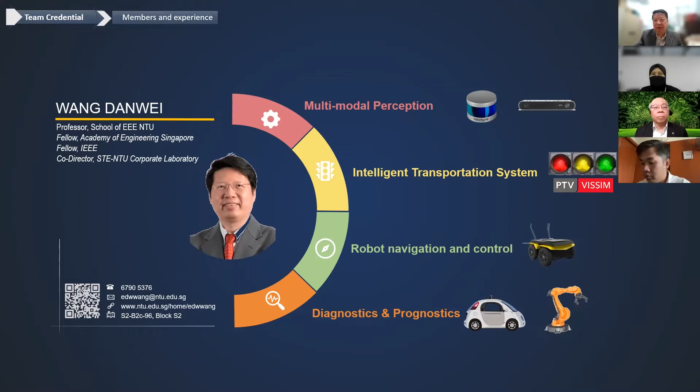Firstly, I want to acknowledge my team, which has grown to about 26 or 27 researchers. I'm still recruiting. Among these 26 team members, quite a few are PhD degree holders, and the majority are master's degree holders. They are very capable from theory to implementation and system integration. They have all kinds of backgrounds, so we are able to manage the whole chain from theory to implementation by ourselves.

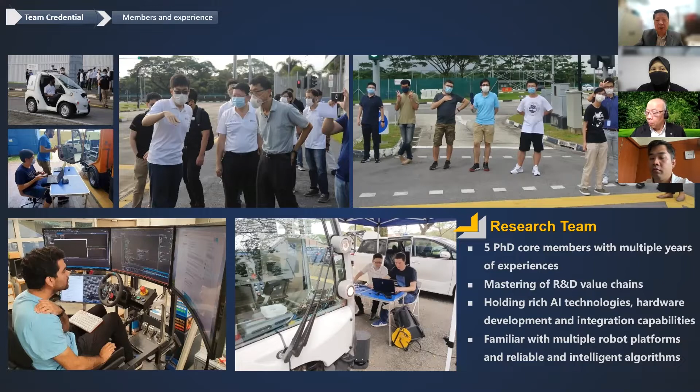As you can see, our systems are developed in various scenarios - outdoor, indoor, and so forth. We have achieved quite a few meaningful results in the past, and we have won some awards.

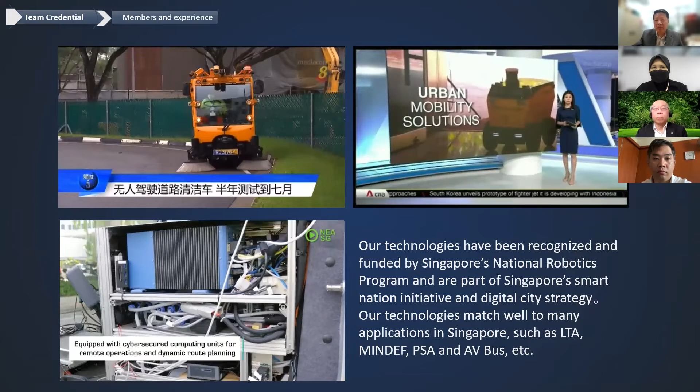In January, NEA announced the launch of proof of concept trials of autonomous environmental services vehicles for road cleaning. These self-driving vehicles are controlled using computing units, enabling remote operations and dynamic planning.

We have been working with industry for the past 15 to 20 years, and from there we see a lot of application requirements. Mostly from government, especially NRF, they provide us funding, and we work with ST Engineering, NEA, Continental, and some other big companies. I also work with some smaller companies as well. These are the major fundings.

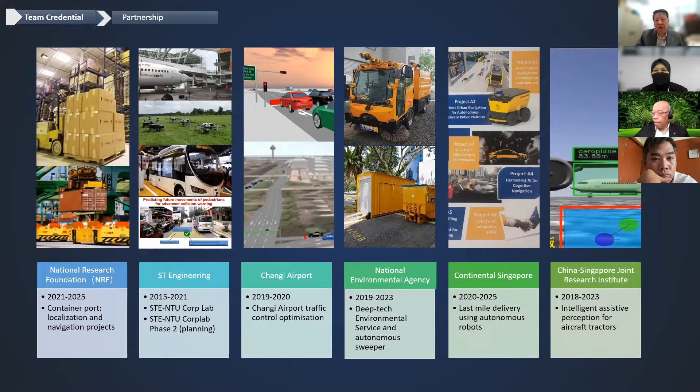From these collaborations, we realize applications out there demand intelligent sensing. They want a reliable sensing capability to upgrade their equipment, their capability from the current version to the next version. The next version is enabled with intelligence - so how to do it? The sensing is the key. In past research, we have filed quite a few patents, mostly on sensing and intelligent sensors.

One typical example of this industry requirement is we are working on a project on this autonomous sweeper. The problem statement is coming from NEA - they want to enable sweeping, the environmental service, with the newest technology, deep tech. We have done this project in the past 3 to 4 years, and we have achieved a lot, as you have seen on TV. If you search 'sweepers NTU' or 'teleoperation NTU', you are going to find the media information.

In this project, the vehicle needs to move in outdoor real scenarios. They have to deal with all kinds of situations - in good days, in the morning, in the afternoon, at noon, the sun comes from different angles. During foggy days, during rainy days, and during different situations, even smoke.

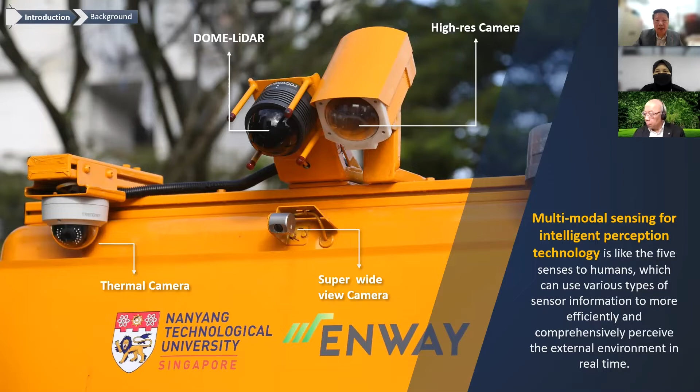When we have so many sensors looking around the environment, we need to understand how this information is fused together and how we interpret all this information to achieve meaningful information so that the computer can understand and follow up with decision and execution.

So this one, as I mentioned, the intelligent sensors actually promote the upgrade and iteration of the intelligent perception industry. Just like environmental service, now it's being done by some foreign workers - we hire them to drive the vehicle. In the future, people could be sitting in an air-conditioned environment, teleoperating the vehicle, or the vehicle running autonomously outdoors.

This will upgrade the whole industry sector, not just one individual machine, the whole sector. So our Singapore young people might be interested in going there, sitting in this nice environment, playing with these intelligent big toys.

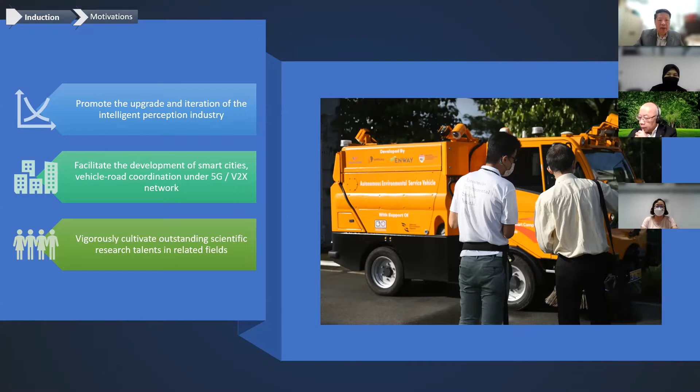Actually, it's not just one or two stories. If you look at the market survey, these intelligent sensors have a great future. By mid of 2023, this advanced perception function will become a standard configuration of collaborative robot systems. These days we hear about robots, but single robots is basically mature.

What we are looking into is when we deploy robots, we want to deploy them in large quantity. So we are going to manage a fleet of vehicles, a fleet of robots. They need to work together, so the perception of each robot, or as a team of robots, will become an important issue. With more perception from multiple vehicles, multiple sensors, you can enhance this intelligence tremendously.

Everybody heard about Tesla, and they have camera systems on each of their autonomous vehicles. When they run around, they collect all the information and put it into the cloud. The cloud provides the training, gets the information, and at the same time feeds back to the individual robots, the vehicles. So basically, this is collective intelligence, based on multi-modal, multi-sensor, multi-robot systems.

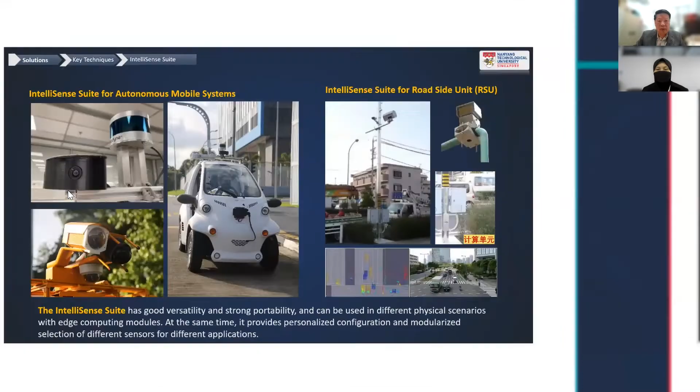So for this intelligent sensing, which is the first thing, we want to have good sensing capability. The first thing is we need a suitable sensor suite. Based on the application, you need to choose the right sensors, their range, their capability, and what results you want to achieve. Then you select a set of sensors with different capabilities and put them together.

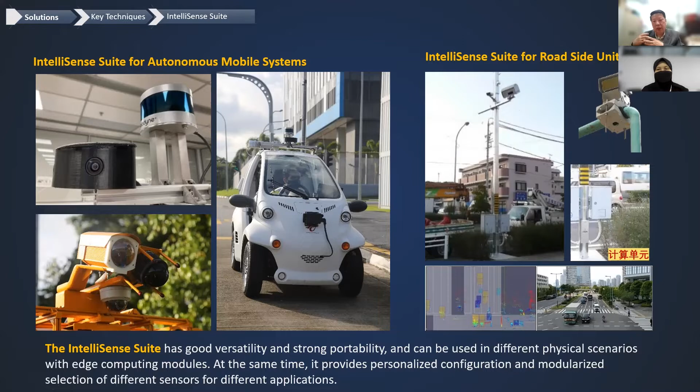Such as on top of the car, on top of traffic signal poles—in these cases, based on this input, you can fuse them and get what you want. This will require integration of some sensors. These are some of the products we have developed. This one is a handheld sensing device which can detect people, chairs, tables, cars, airplanes, and whatever.

I'll show you what it can do later on. The other one is on board a vehicle. We have two sensors on the two sides of the vehicle, and one unit in front of the driver. So this one is basically assistive perception.

In many situations, we human beings are not able to see so many things or monitor the danger. So this system will help us monitor the front, such as at the airport with tow truck vehicles pushing a huge aircraft. You hear about accidents, collisions between aircraft—that's a tremendous loss to the airline and passengers, causing a lot of problems.

We have also developed these tower-mount perception devices—from handheld to onboard to tower-mount or mounted on buildings. We have designed all these based on the requirement.

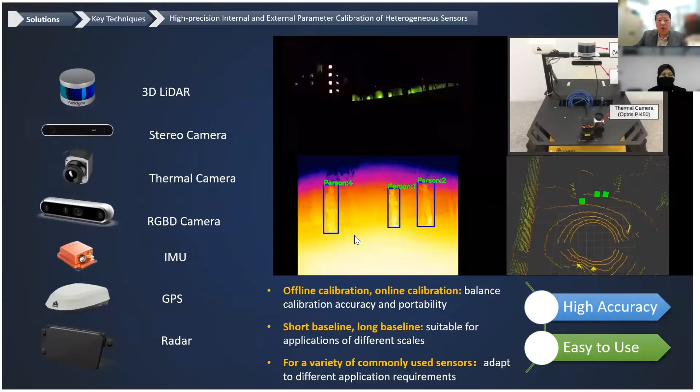Now, with all these combinations of sensors, we can do a lot of things. Here it shows we need the capability of perceiving detection from day to night. In the day, as many people have seen, we use an RGB camera with some intelligence, and we're able to detect and track many dynamic objects. But when evening comes, it's a challenge.

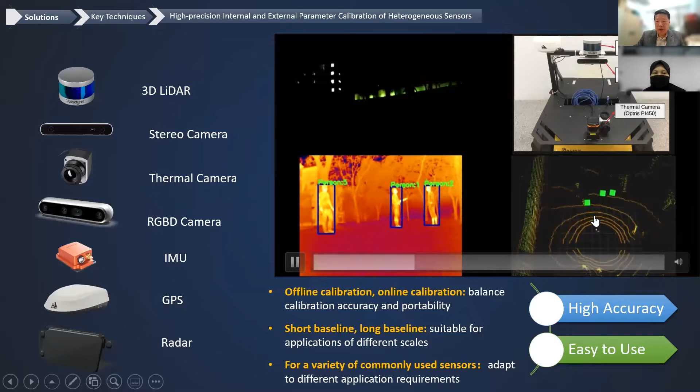Here is in front of Hall 7. At night, it's completely dark and the RGB camera cannot see anything. But we combine with thermal and LiDAR, and then we achieve this result. How to interpret this result? With the LiDAR, we're able to map the static environment—we know where the trees, roads, and fences are—and we're able to detect where the individuals are, with their locations pinpointed in the static map. These are all live, can do it.

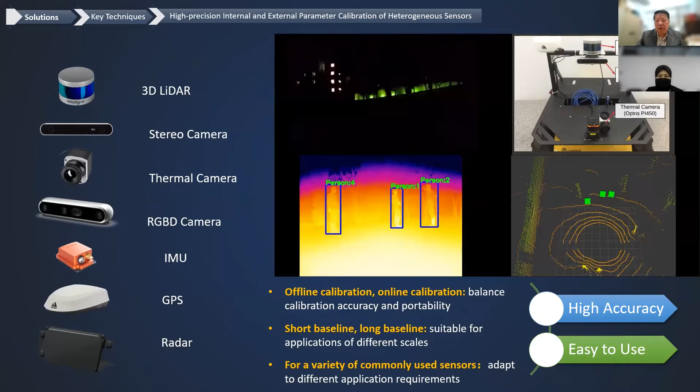Now we have developed this. The previous one is based on calibration technology which we developed—we can calibrate. When you put the sensors together, you can calibrate this quite easily, and the baseline is normally short, okay.

Here we have another set of technology which is a long baseline. As you can see, we have one sensor suite here, and the other sensor suite on the other side of the building. They are quite far away, placed quite arbitrarily and at random, so the calibration can be done almost instantly. The result they achieve is that each sensor sees the environment from one angle, and the other sensor sees it from the other angle.

We are able to put all these sensors, these point clouds, into a single frame, and then all these vehicles will have a complete 3D model of these point clouds. This can be used in multiple applications, like a digital twin. The methodology here requires minimum human calibration—it's just one key, and we can do this calibration automatically.

Another application is putting it on this overhead bridge, looking down to the highway. Two cameras, two sensor suites, look into the highway, and the left and right can detect the vehicle from two angles. We can combine this point cloud into one, with a denser point cloud and a 3D model, making detection more reliable. Tracking will be more ensured, because occlusion happens all the time when dealing with a vision-based system—this is one headache people face. So we solved that problem.

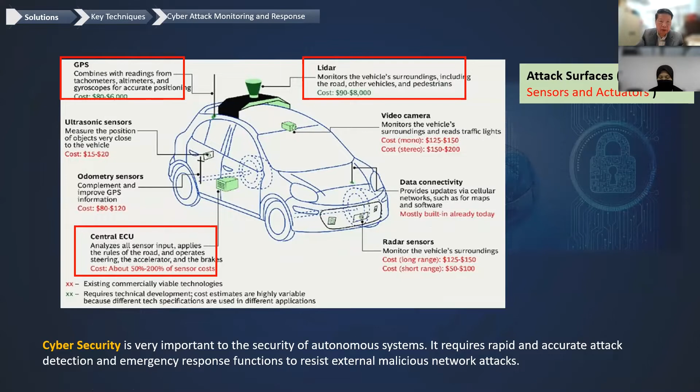So we look at the sensor part today—we are concerned about the cyber attack. What we have done is look into these two sensors: GPS can be spoofed, and once it's spoofed, the vehicle will not recognize its own real position.

It will perceive it's in a fake position. So in this case, the vehicle might think it's moving on the pavement, and thus try to move to the other side, which will guide the vehicle into the pavement or into opposing oncoming vehicles.

That is very dangerous. The other sensor, LiDAR, can be attacked using playback. What it means is the vehicle is in this position—actually the LiDAR will give you the point cloud of this place.

Instead, under this cyber attack, the point cloud from a different position will be fed into the computer, which will cause confusion to the decision-making or the intelligence system.

Now we use this autonomous sweeper to do a test. We use a GPS, camera, LiDAR, IMU, and actuators—but today we are going to talk about the sensors only.

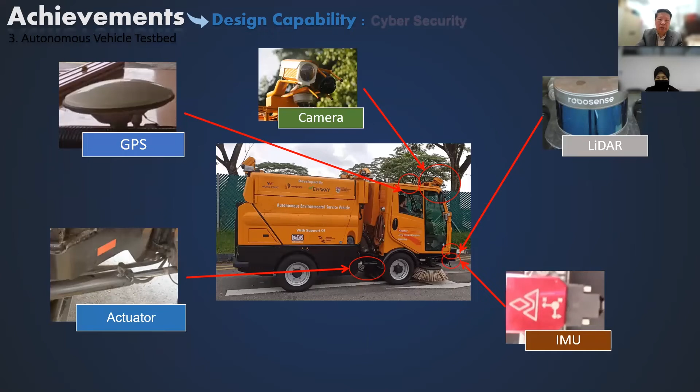We look into various attack scenarios: suddenly the attack stopped the reading of the GPS—normal reading is like this, but it stopped the reading. Sometimes it gives you a false reading, and the most challenging one is it gives you a continuous false reading.

So this one is very difficult. For the LiDAR, as I mentioned, it gives you an earlier recorded point cloud. We have developed the algorithm and implemented it in the real vehicle. Here it shows the LiDAR is under attack, and this person launched the attack from a remote place.

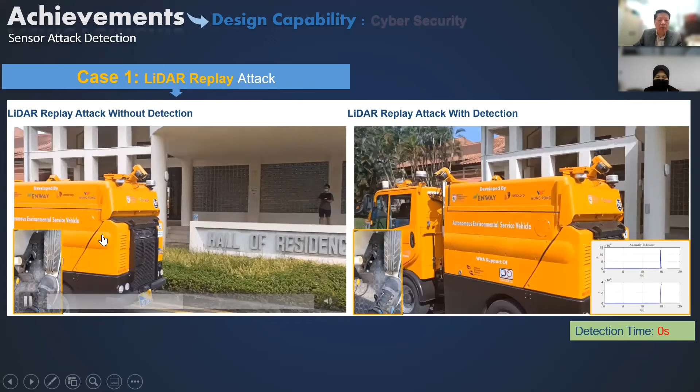The vehicle, without the detection algorithm, gets confused and moves toward the parked car, so the safety driver has to brake.

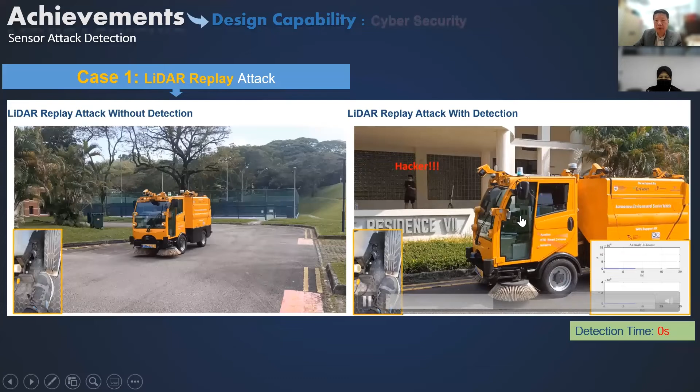Now, when we use our detection algorithm, we are able to detect the interference from the hacker, and once it's activated, it can be detected and stop the vehicle. We have done this many times. For each scenario, we carried out 20 trials, and every time it was successful.

Even for multi-sensor attacks, where two prime sensors are both under attack, both major informants are telling you wrong information, so you tend to believe it, and it becomes difficult to figure out. In this case, it took a bit more time to identify there is an attack. Otherwise, for a single sensor attack, it's detected in a fraction of a second or within 2 seconds.

Using multi-modal data, we can achieve a lot more than with a single sensor. In this case, LiDAR gives us a point cloud, which is used by autonomous driving. It's good enough for the machine, but for a human, we cannot drive or teledrive based on this 3D point cloud.

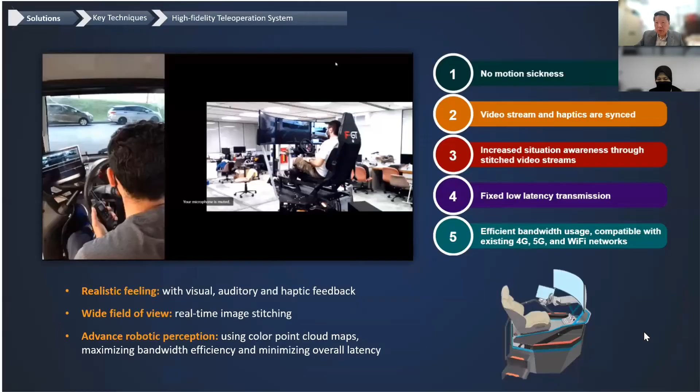Due to time limitation, I'm going to talk about another one.

This one is teleoperation. Teleoperation is nothing new in terms of concept and devices; there are lots out there. But for heavy-duty and fast-moving vehicles, current teleoperation systems don't work well. Even though they use only one small screen, because they don't want to beam back so many videos, they still suffer from a long delay, and a very common delay is 1 second.

For a 1 second delay, that means it's the time between the camera capturing the real scenario and the teleoperator seeing it on the screen.

That is not acceptable when we are doing teleoperation. Now we use robotics and sensing technologies, multiple sensing technologies, we are able to do this teleoperation with comfort. Here what we have come up with is a teleoperation platform which has motion, also based on the sensor. So this guy is sitting on this platform operating inside an air-conditioning environment, then he's driving a vehicle outdoors. So when the vehicle is moving outside, he feels the same, he feels like he's sitting in the real vehicle.

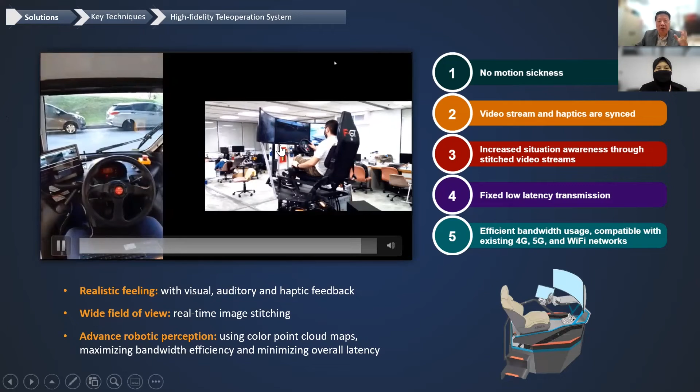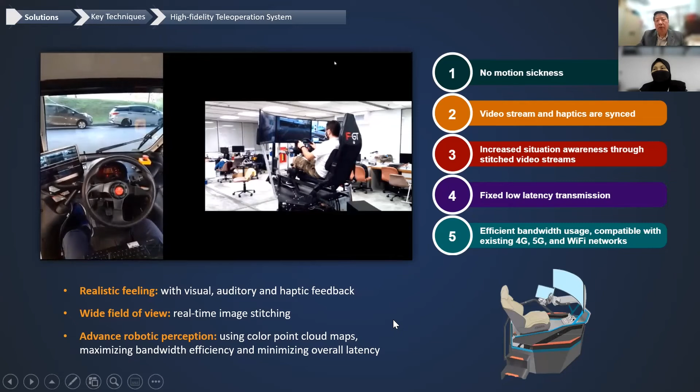So now we have developed this system, where motion, vision, and auditory work together, so that the teleoperator can feel like he's driving in a real vehicle. Of course, here there is one critical technology, which is the image processing and multi-sensor fusion. And we manage all these in such a way that we cut down the bandwidth requirement.

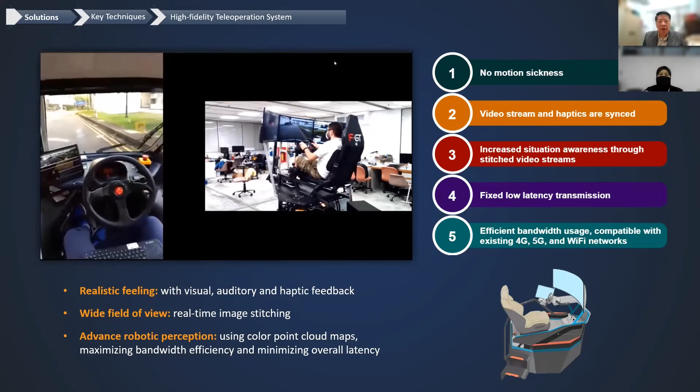We send them back with only 190 milliseconds. Basically, industry or experience tells us 250 milliseconds is the bar. If your feedback latency is smaller than 250, then you feel very much natural, you feel like sitting in the vehicle. If your latency is beyond 250 milliseconds, then it's going to be dangerous. We achieved this, and it was very successful.

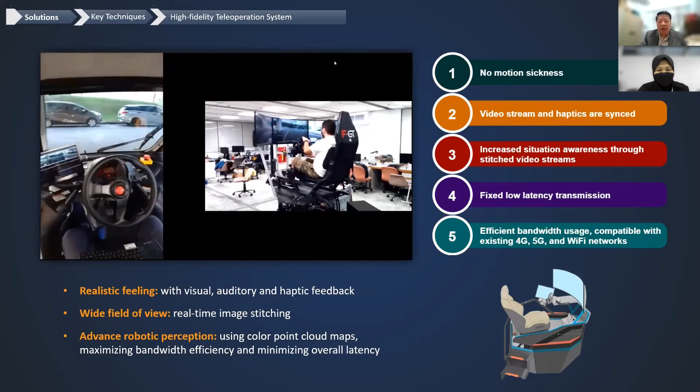This video was done long ago, so now we have one big screen, and all the videos are stitched together. And with our technology, we are working on a new technology, we're able to cut down the bandwidth requirement tremendously, by 13,000 times.

So currently we have 4G, we have 5G, but 5G is not popular yet, and even 5G's blind spot coverage is not good enough. So very often the transmission is not doable, even in the 5G environment. So we developed the technology to cut down the bandwidth, relying on this multi-modal sensing technology. With that we can cut down the data transmission rate by this much, so we can operate in 4G. That is a wonderful reliability.

Okay, I guess after this video I have to stop due to the time limitation.

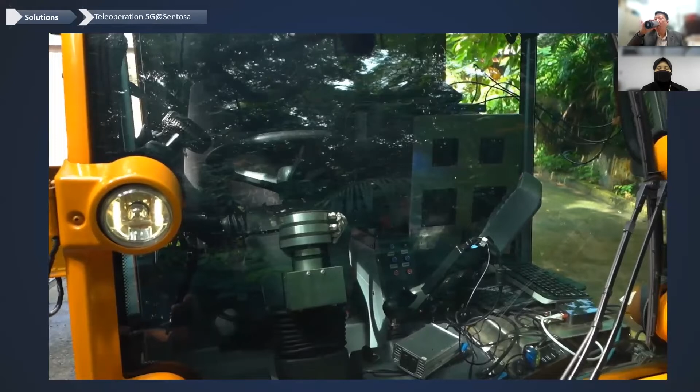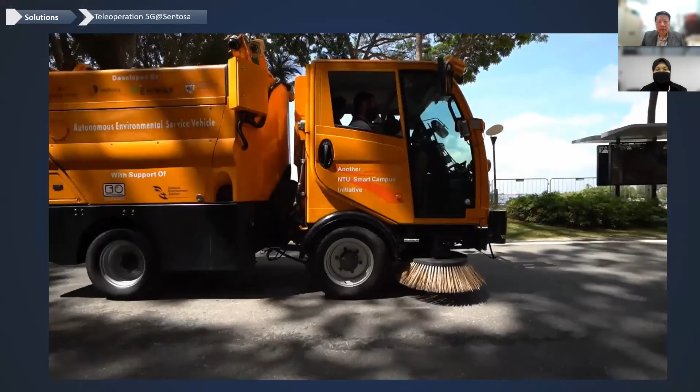Fully autonomous transportation will be a part of our daily lives in the future. Today, human intervention is still needed in the teleoperation of autonomous vehicles. Current teleoperations on 4G do not receive sufficient communication bandwidth for real-time sensor and video data transmission, causing substantial latency in teleoperation and haptic feedback. Without real-time haptic feedback, teleoperators using these systems are prone to motion sickness.

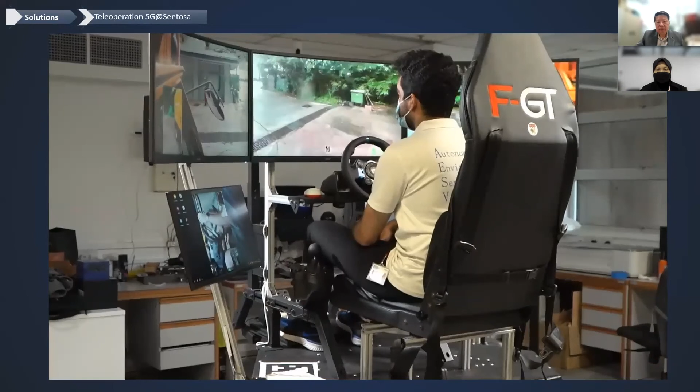As part of the 5G at Sentosa program, the National Environment Agency and Nanyang Technological University are trialing high-fidelity teleoperated autonomous vehicles connected on Singtel 5G. The developed system provides a 180-degree frontal image surrounding the driver, and is the first in the world to simulate vehicle movements, acceleration, and steering wheel stiffness in real time as haptic feedback to the teleoperator.

We can use this teleoperation to control a driverless vehicle, such as a sweeper, in a remote location. Here the teleoperator is in NTU and the sweeper is in Sentosa. So in this teleoperation, there is a requirement of transmitting large amounts of data from Sentosa to NTU. With 5G, videos with maximum achievable image quality, haptic feedback information, and control signals can be transmitted back to NTU in real time, allowing the teleoperator to respond immediately.

So we partner with GovTech and Singtel to carry out this trial at 5G at Sentosa, and so far the result has been very successful. So due to the time limit, let me stop this one.

So I move on. Basically our multimodal sensings have achieved, and were carried out with such objectives, to achieve such features. So they are modularized and robust against all weathers, and we are able to continuously track the objects. We have a long baseline calibration, so when the sensors are put at arbitrary distances, we can do this calibration easily. We can work with 5G, broadband, and long-range Wi-Fi, and achieve the desired results.

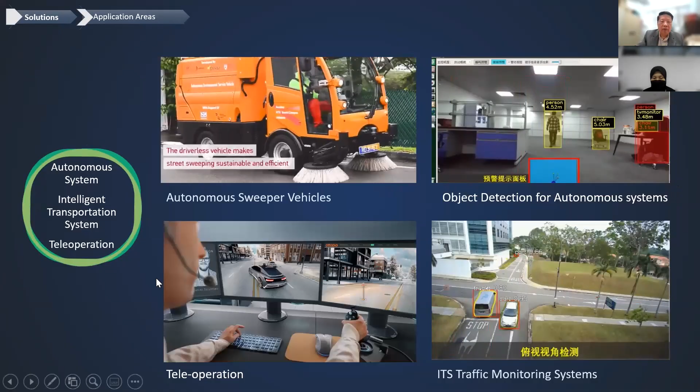Okay, so this is something we have. I guess I don't have to say too much, you can imagine basically wherever you require an intelligent system, sensing is the first capability you want to have, and that is the first line of intelligence. So due to time limits, let me stop here.